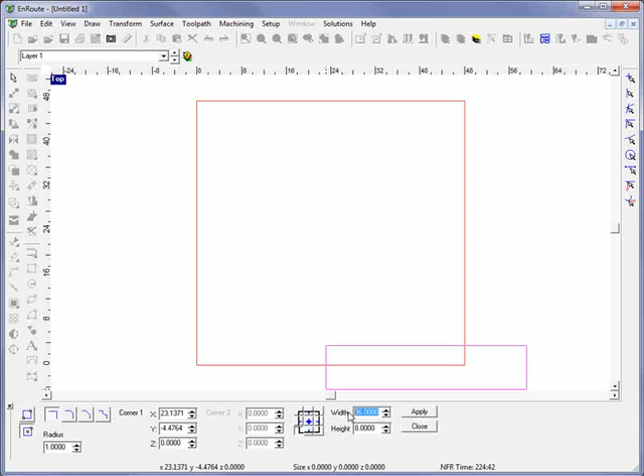So what we'll do is come here and draw a rectangle that'll represent our size part. I'm choosing a rectangle construction, going with a width of 36, a height of 8, and I'll just place this on screen. So I have my size here. I'll move it to the lower left-hand corner by hitting control and the number pad from the right of the keyboard. Now, this is an 8-inch wide part, so I'm going to come here to the partial contour offset.

I have my value set here at 2. I'm going to click on this side and hit towards the middle. Click on this side and hit towards the middle. Now I'll click on one of the ones I just created and click again towards the middle. And now I have all three of these lines here.

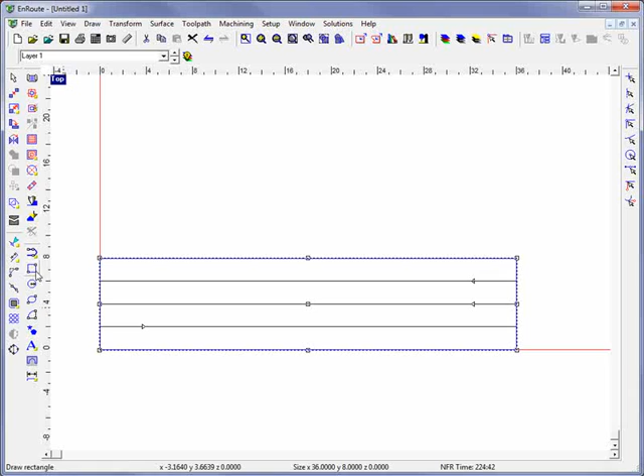I might also want to come here and offset 2 inches from the sides as well. I can just come here and create 2 offsets. There might be an easier way to draw this, but I'm just using a few different tools here.

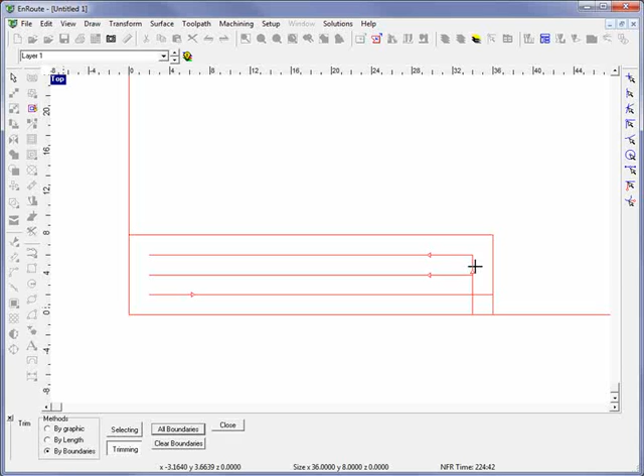Now I'm going to trim this by boundaries, all boundaries, and we can just go through here and remove the little sections we don't want. Put the cursor right over there and click, and it will disappear.

So now we see I typically would like to have my flutes here, my geometries heading in the same direction to get a uniform cut. So let's reverse the open contours here so they're all pointing the same direction.

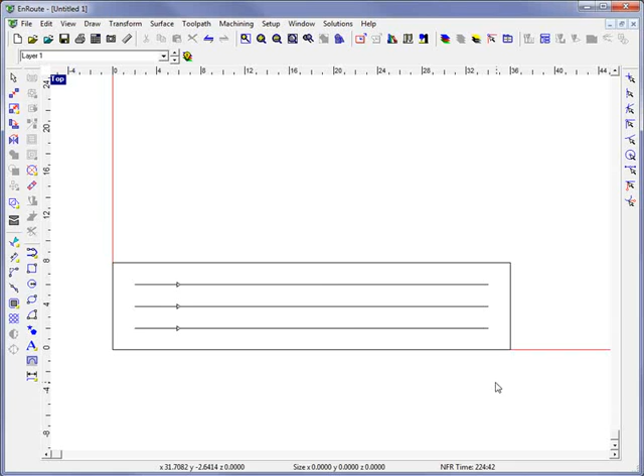Now we would be able to come here and select our parts, and we're going to go to the toolpath menu and say open contour offset. Here I need to select the tool I want to choose, and I'm only viewing my ball nose tools here, so I'm going to choose a 1/2 inch ball nose tool.

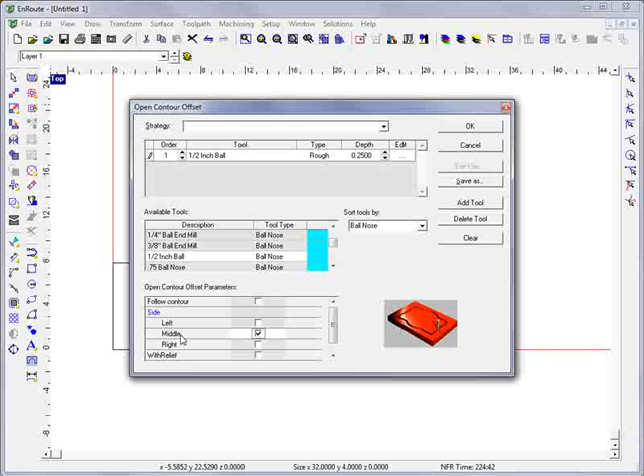I'm going to enter my depth of 0.25, and I want to go down the middle of this line, so I'm going to check middle. Now when I come here and click on these 3 dots to open the cut definition for this specific tool, I'm going to see my entry exit right now. My entry exit right now is at none.

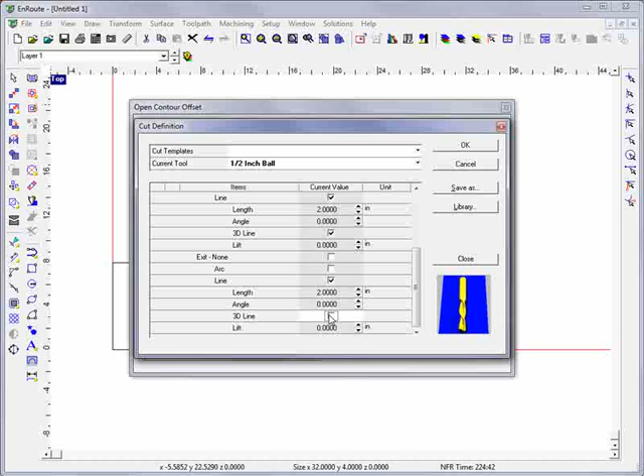So let's say we wanted to do a line entry, and let's just do a 2-inch entry, 0-degree angle, and make it a 3D line, which means it's going to ramp into the part. Again, 2 inch, 0-degree angle, and check 3D line. I'm not going to worry about my feed rates here. Just go ahead and hit this and say OK.

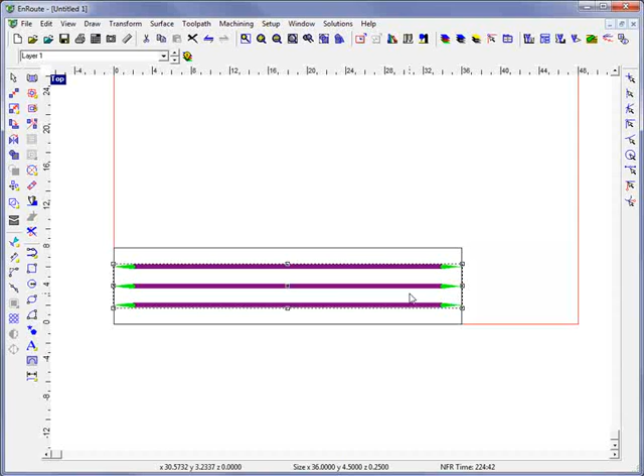What we can see here is it will actually extend that 2 inches to the end of the part, and it's going to create kind of a little taper at the end of each of these lines. This would prevent me from doing this. In the previous version of EnRoute, I could only go up to a 90-degree angle here, so it was causing a problem to do a 3D entry on this sort of thing.

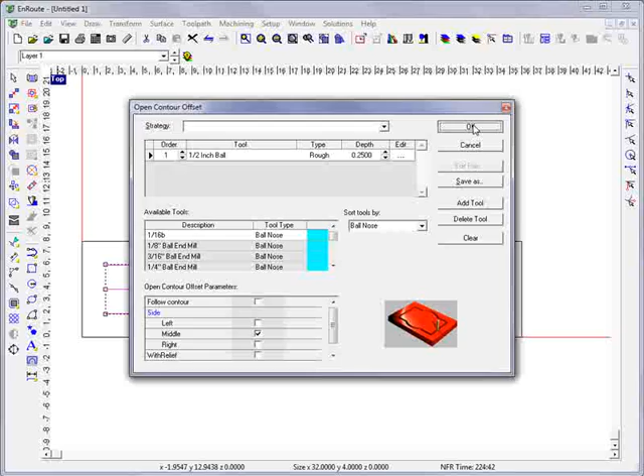And we've now allowed it so that you can go to a 180-degree angle on your entry and your exit. By doing so, you'll allow the bit to plunge in on top of the line and then go to its cut depth and then traverse down the path.

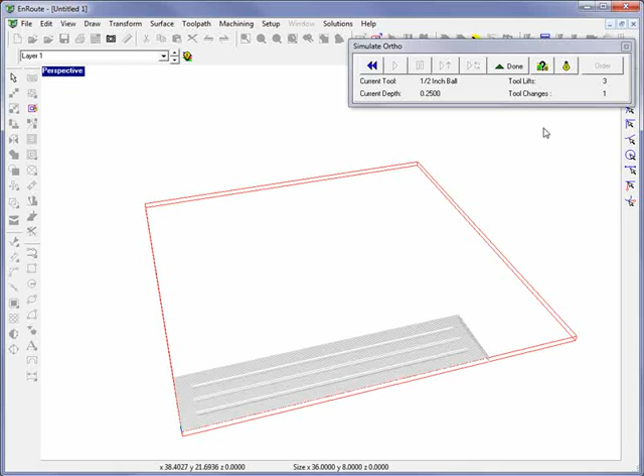So if we want to do a little simulation here, I'll click my outer geometry. I have use selected contours and mask applied. I'm going to hit my play button, and we can shade it in here now. We can see it did not take long to cut this.

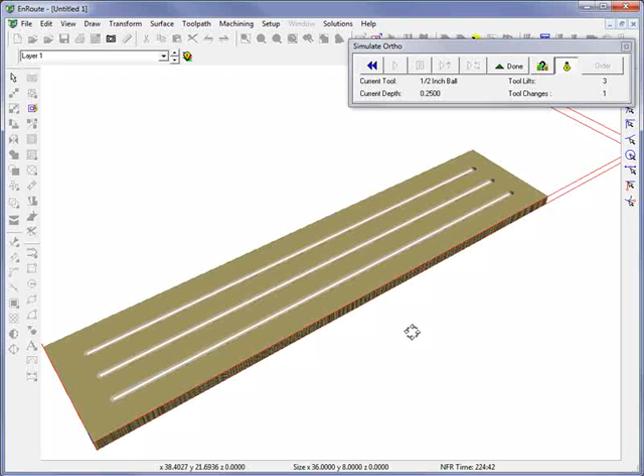So we can see here that the parts are created, and we do not have any tapered effect because we're able to ramp in on the line at a 180-degree angle and then traverse down the part. So this has been the change to the entry-exit parameters, and you can now use a 180-degree entry-exit on an open contour offset within EnRoute 5.